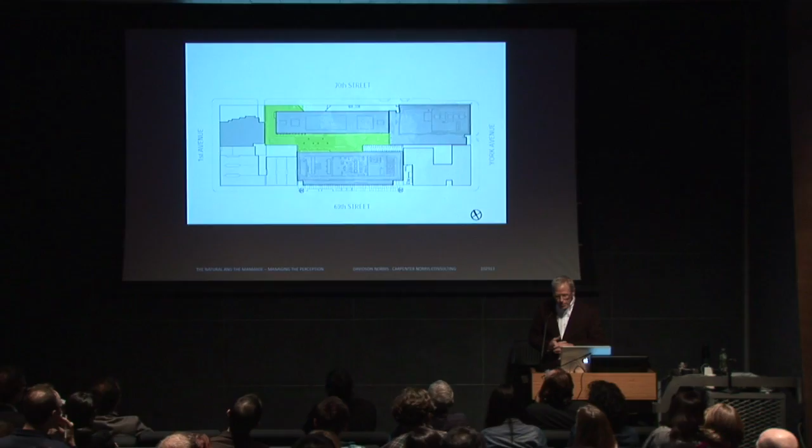You're looking at a courtyard on the Upper East Side. On the south side of the slide, a new building has been erected that is probably 300 feet tall. On the upper right, in the northeast corner, is an existing building, probably about 200 feet tall. To the north is a building that is probably 15 stories, or 175 feet tall. Smaller buildings to the west, particularly the southwest, and then to the southeast.

The result is that this space, given the fact that it previously had a much lower building to the south and therefore reasonably abundant light, now faces the quandary of having very little light whatsoever. So we were asked to take a look at what could be done in order to restore some of the daylight to the space.

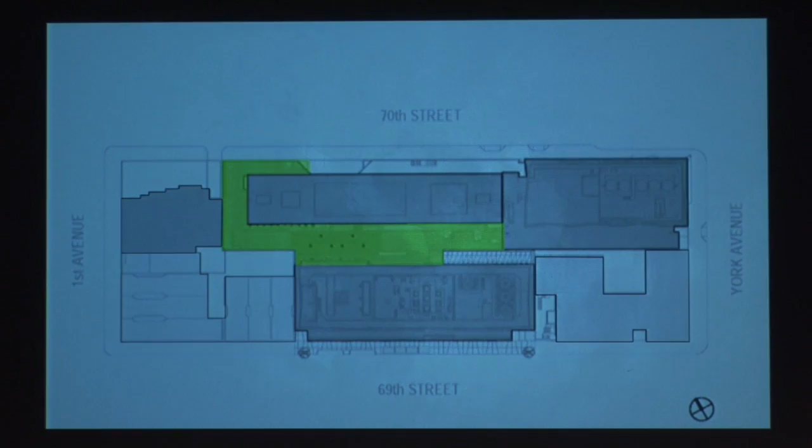These are the architect's renderings of the space on the upper left, and then a construction shot taken some months ago on the lower right. At the very least, the architects didn't kid themselves and provide a light image for the prospective courtyard with the sun blazing in and with lots of bright characteristics typically identified with daylight. I think his portrayal is actually reasonably accurate. But as you can see, it is a space that has very little or no direct sunshine.

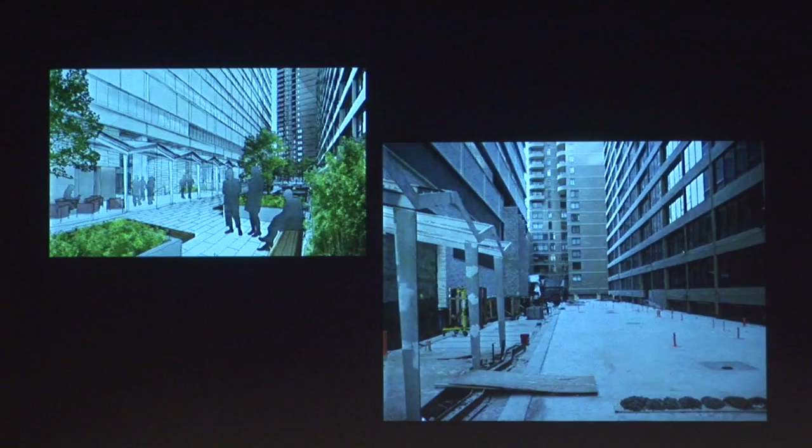Another perspective, this one looking towards the west, and you can see the presence of a raised platform in the mid-distance, which is one of the architectural focal points of the space.

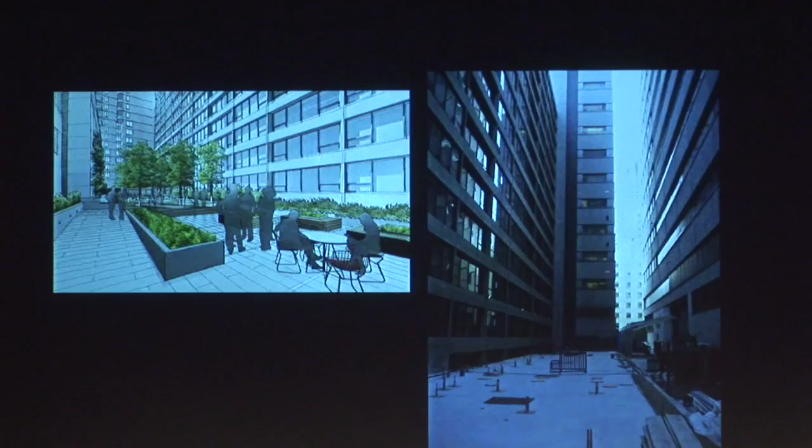This is a sun mass diagram taken from the center of the courtyard, and as I think it quite vividly proves, there's very little in the way of direct sunlight that ever strikes the center of this courtyard. You can see, however, that there are two windows.

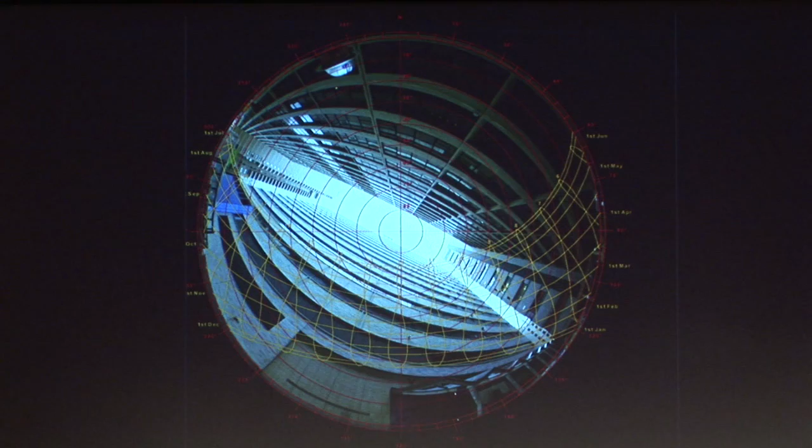If one starts to think of this as a space, there's a window off to the east, and a larger western window over here, and then there is a skylight overhead. So despite the fact that this space is very enclosed, there is the promise of some light resources that we can count on in order to modify the light regime in the courtyard itself.

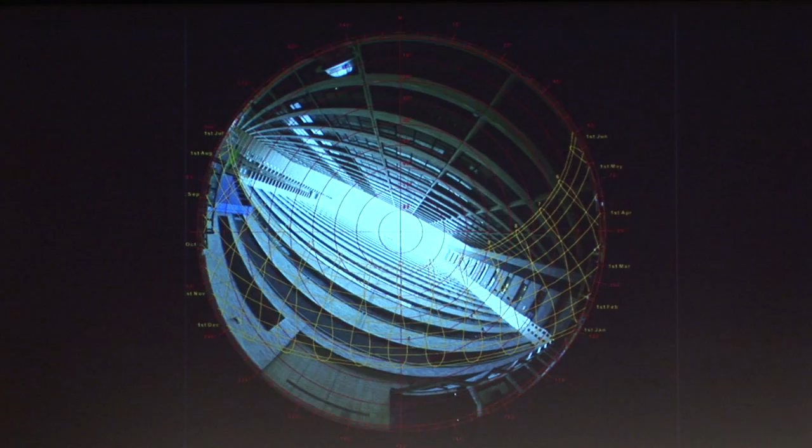Nonetheless, this gives you some sense of the quality and character of light within the courtyard. So what we were given was the daylighting fact.

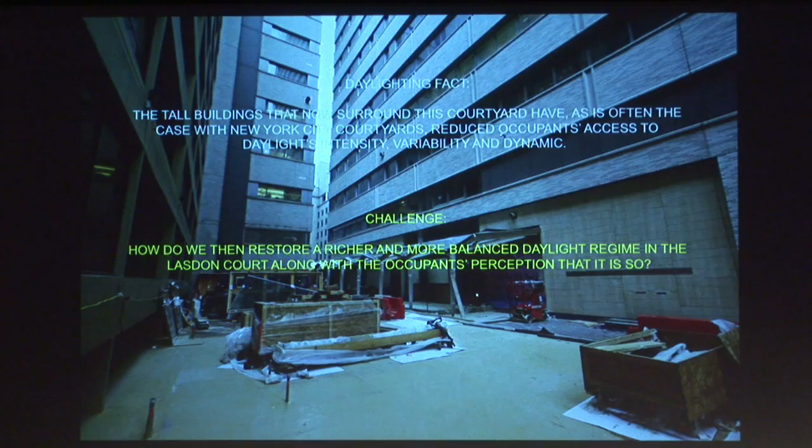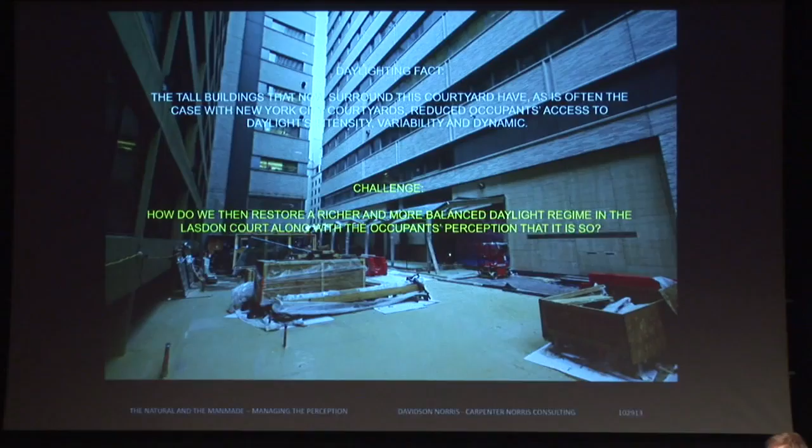Tall buildings that surround this courtyard have, as is often the case with New York City courtyards, reduced occupants' access to daylight intensity, variability, and dynamic. The challenge is, how do we then restore a richer and more balanced daylight regime in the Lasdon court, along with the occupants' perception that it is so?

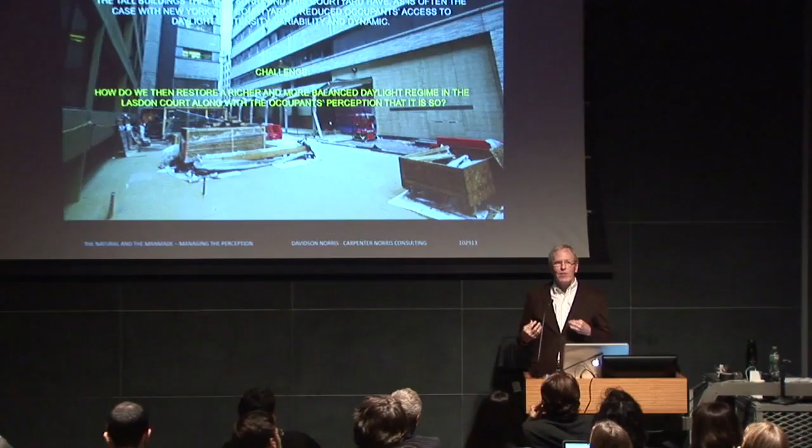This last one, perception that it is so, is critical. It's not a question of trying to bring back the light that used to be. It is a matter of how we can bring back the minimum necessary light to make people believe that there is not abundant, but maybe adequate daylight in the courtyard itself.

So we're trying to do this kind of minimalist restoration project of light in the courtyard. The first thing that the team did, and this was very much a collaborative enterprise between the architect, the landscape designer, and the lighting designer, was to come up with an appropriate solution.

I think we quickly settled on Paley Park as having the right kind of quality of space, quality of light that we were looking for. Also the fact that it provided a place for people to sit down and actually experience and hopefully enjoy the courtyard. It had abundant greenery, so there was a landscape feature to it. And then there was this water feature.

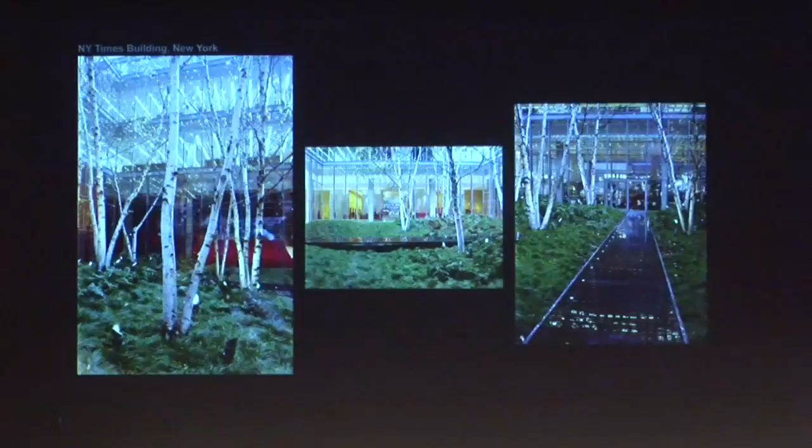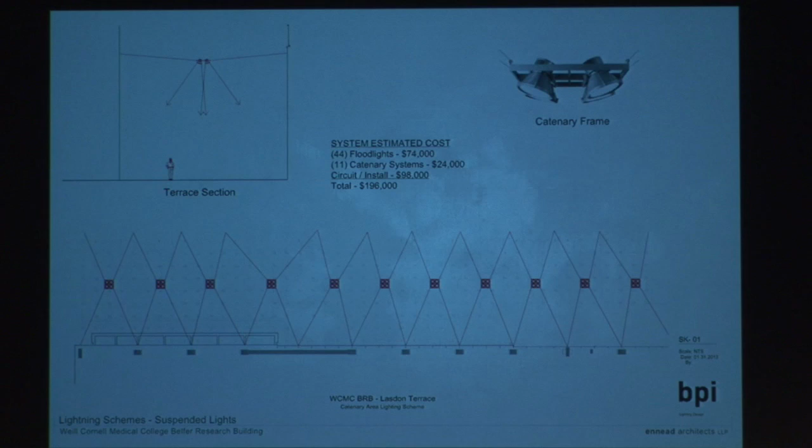The lighting designers proposed the option of actually illuminating and restoring much of the light using electric light resources. They were somewhat sheepish about proposing this because they realized that with this kind of proposal, they were never, ever going to be able to duplicate the intensity of sunlight, the color rendering of sunlight, never mind its dynamic. So this was proposed as, this is a really poor idea, but we're putting it on the table anyway.

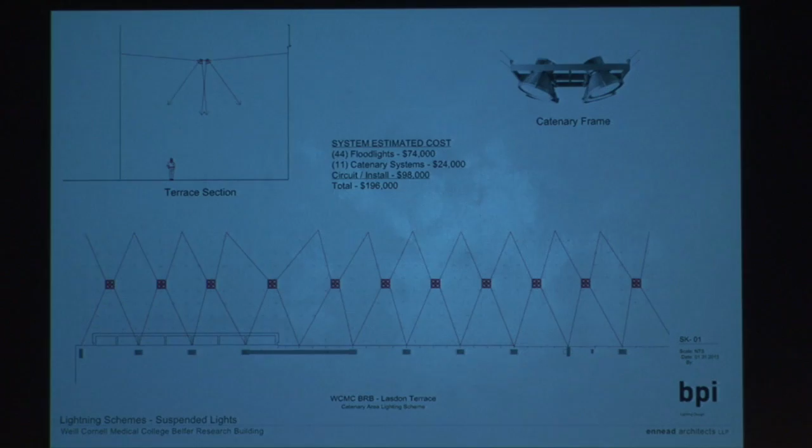The one issue here, however, common to all heliostats, is that for all the information and character and quality of natural light they reflect, they in fact subtract from our perception and experience of that sunlight a key feature, which is its dynamic. It is static sunlight. So we were somewhat compelled by the idea of using heliostats, but reserved about that light having to be carefully targeted, being pretty much static.

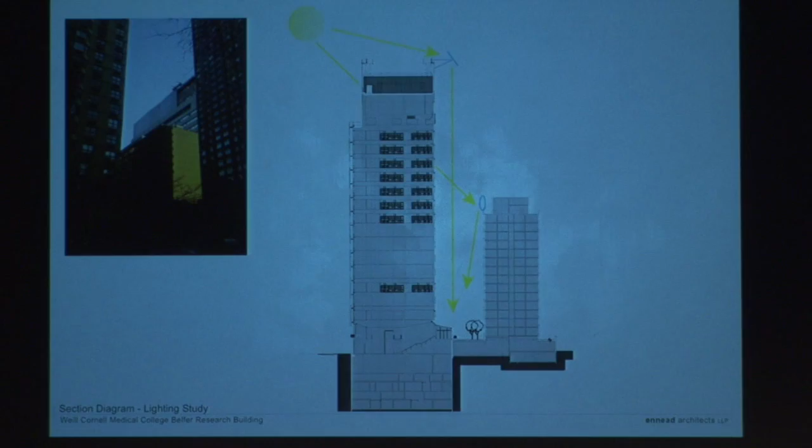In addition, these kinds of devices are fairly costly, and putting them on buildings where we could gather and redirect light involves some pretty serious structural gymnastics. Beyond which, the institution took the position that it really didn't want any additional maintenance headaches.

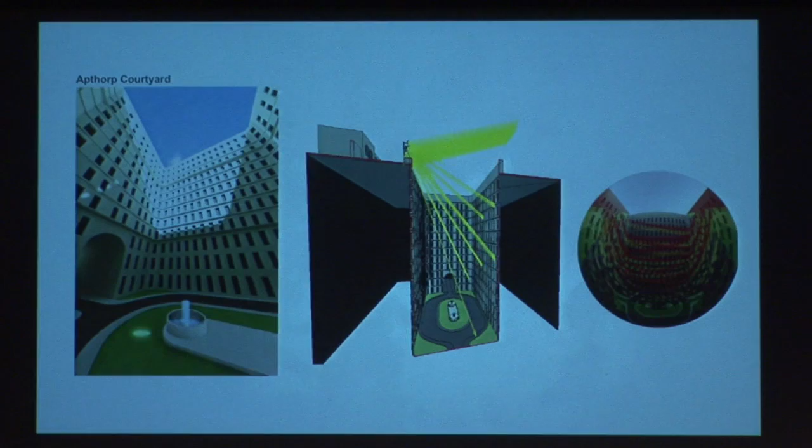So our focus turned to something that has been brewing in our office for some number of years. Given our experience with the heliostats, and for the reasons I just cited, we had started to consider moving away from sun-tracking mirrors to a matrix of mirrors, an array of mirrors that replicated much of what the heliostats did, but did it with fixed mirrors.

The heliostat changes its tilt and turn literally every 10 seconds in order to target the light. What if, over a given day, you had 20 mirrors that subdivided that period, and each one was fixed and provided light at a given time on a given day? So with enough fixed mirrors, you could actually replicate much of what you get with the heliostat, and in theory do it at lower cost.

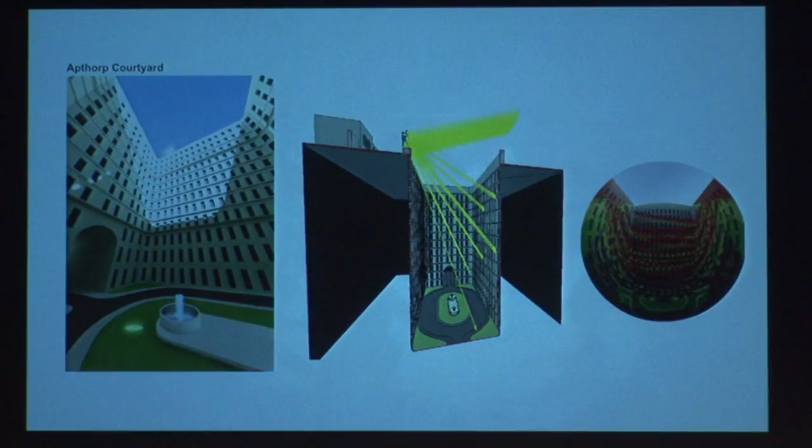So this was a thought experiment we did using the courtyard of the Apthorp on the Upper West Side. One of the complaints in the Apthorp is that for all the cost of the north-facing apartments that look out into the courtyard, they never get any sun. Real estate agents selling those apartments were very interested in possible ways of reconnecting them, and therefore their value, to increased sunlight.

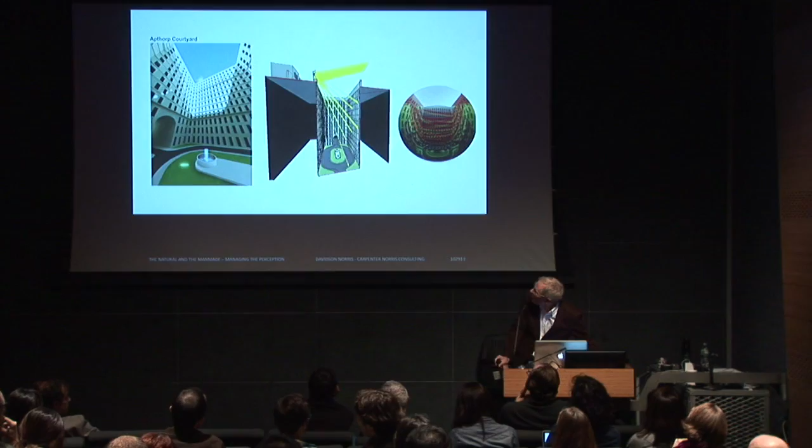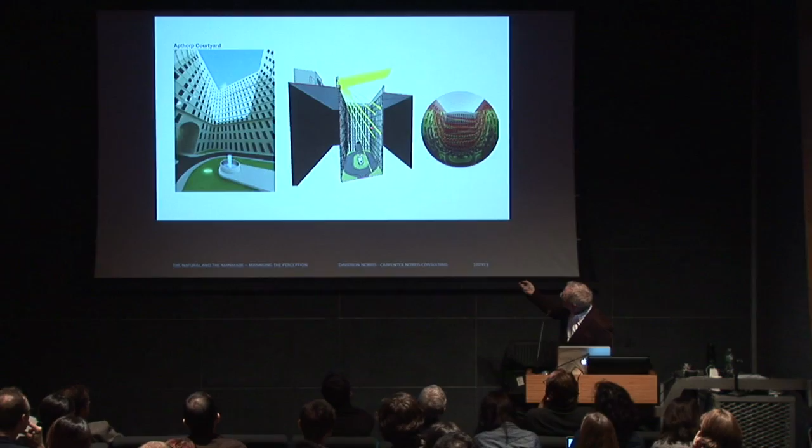So what we proposed was an array of only 9 mirrors up on the northwest cornice of the Apthorp, each one fixed, designed to project a series of beams starting at the courtyard level up to the top floor into the courtyard. A series of studies we did made this look very promising. Over the course of the day, this mirror would move across on a gentle arc and essentially illuminate, with reflected sunlight, all the apartments at this level.

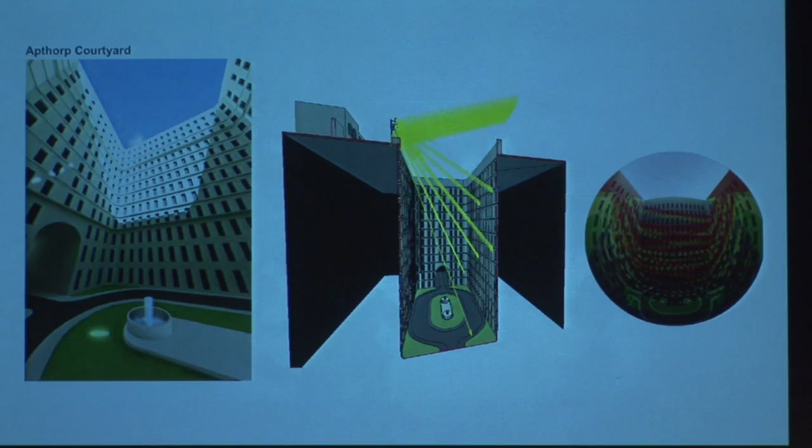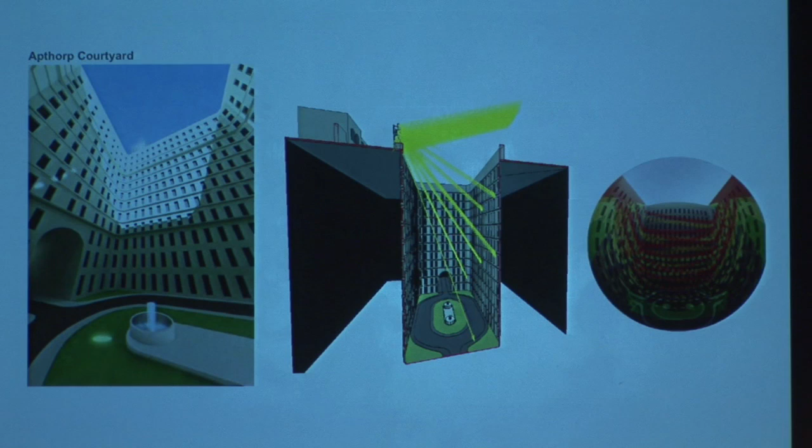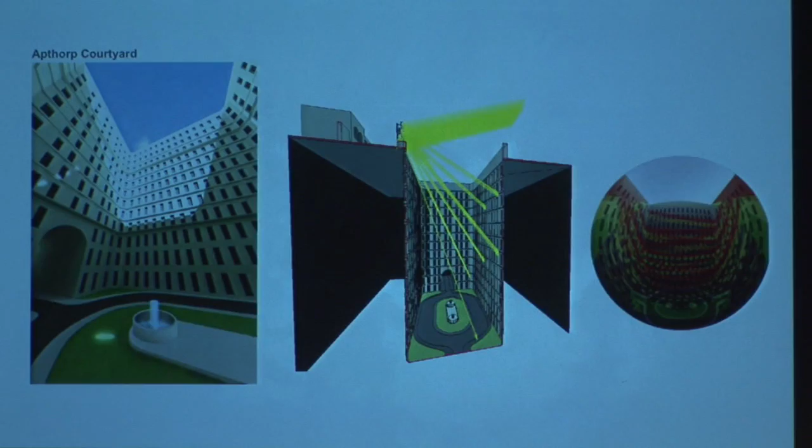This image on the right takes all the days from December 21st to March 21st and records all locations of the reflected sunlight. As you can see, the coverage is actually extremely good, all the way from down in the courtyard itself to nearly every apartment in the building. It was enough of an experiment to convince us this could actually work, and it became one of the options considered for our uptown courtyard.

Our confidence in this was amplified by a project recently completed in the new federal courthouse in Salt Lake City, Utah. We were given the charge of an art project—what to do with light in a very tall, thin atrium.

The first thing was to occupy the atrium with targets. In our parlance, these are targets—objects to which one directs light in order for that light to be redirected in such a way that you perceive it, enjoy it, take note of it, and it changes your perception of the space. They are extruded hexagonal, highly reflective aluminum prisms, and in fact take their inspiration from ice crystals that form frequently in the atmosphere surrounding Salt Lake City.

So if you have your ice crystals, the next question is how do you get the sunlight on them? You do that by a series of mirrors at the top of the skylight that reflect the light down, each tilted at a different angle. The result is that each one projects light directly down into the space so that it intersects with the intervening ice crystals in such a way that they interact regularly. Now, it takes the sun being on axis with the skylight.

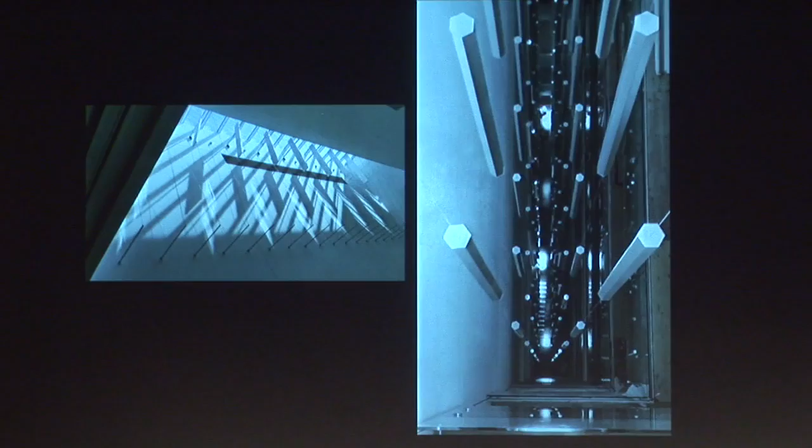So we got these images back and started to gain confidence in our idea that these fixed kinds of systems could not only deliver light in abundance, but they could do so as long as they hit the targets in a very perceptible way.

Over on the left, a slide showing what happens when the light is projected down and into the ice crystal field. The shadow right here is clearly one of the extruded hexagons that has intercepted the light, so that light is being bounced around within the space.

Over here is an image of the inspiration for this project, which is called a sun column or a sun mast, and it has to do with the formation of ice crystals in the sky, and then they orient themselves in such a way that a low-setting sun reflects off of them and guides the beam to your eye. And a bit of an aside here.

I think one of the frustrations that we feel as daylighting designers is that the resources we have to design daylight in a given place, in a given location, are only quantified. It's never qualified. And the difference is over here—this is a page from a wonderful, extraordinarily valuable document that we use regularly in our office, which is the NREL Climatological Catalog.

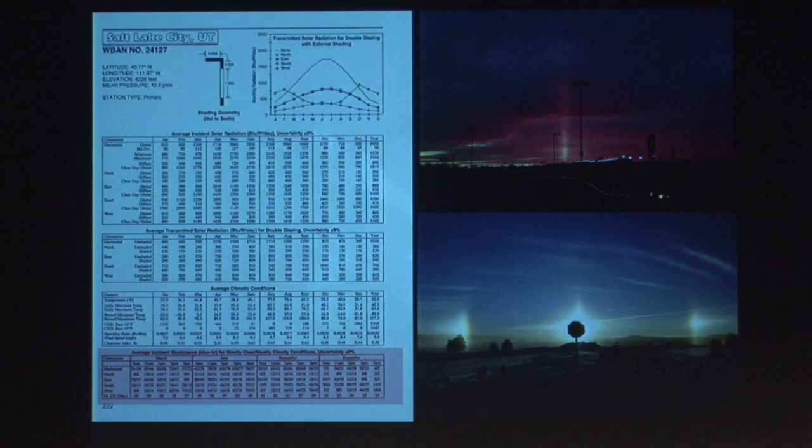What it doesn't qualify—so I call this the light of, or the daylight of photon replacement, right? What it doesn't qualify is this, and this stuff happens in Salt Lake City. And I think that there needs to be another page now in the NREL catalog.

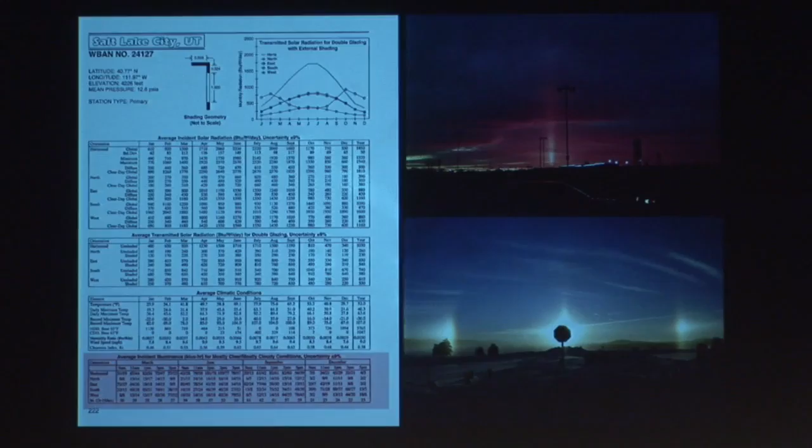It has to identify how often rainbows occur. It has to identify how often sundogs occur. It has to identify all of these different atmospheric light events that are not part of removing electric photons from an office space, but are rather engaged in your experience, your second or third perceptible experience of a given atmospheric environment that is absolutely essential to one's understanding of place.

All right, now back to our project. The first thing that we did was to identify two areas within the courtyard that we felt were appropriate primary targets. One was at the east end. There is a formal stair that connects to the street through here.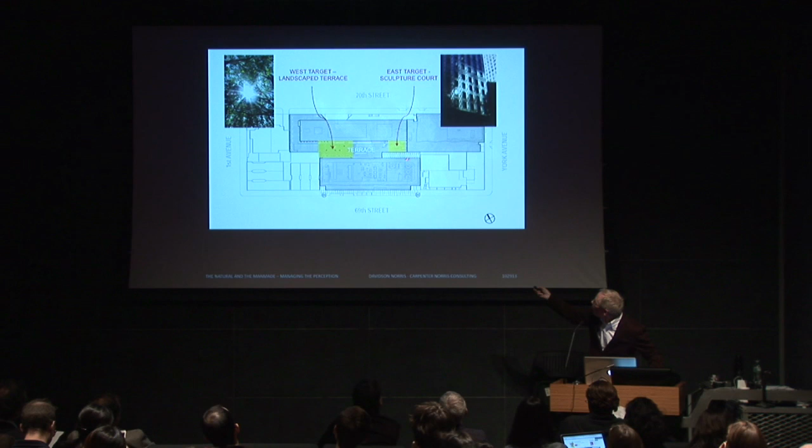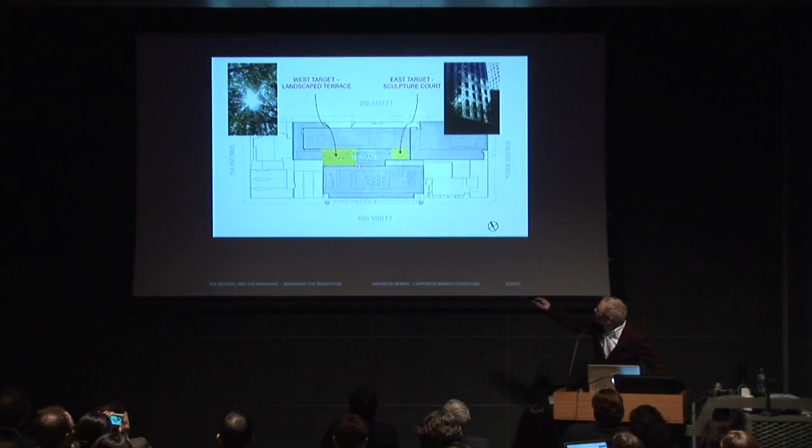And arriving at the top, we felt it would be important for one to perceive sprinklings of light within it. And then over here, this raised platform where most of the occupants, either the researchers here or the residents here, would congregate for lunch, would congregate with their families, and so on.

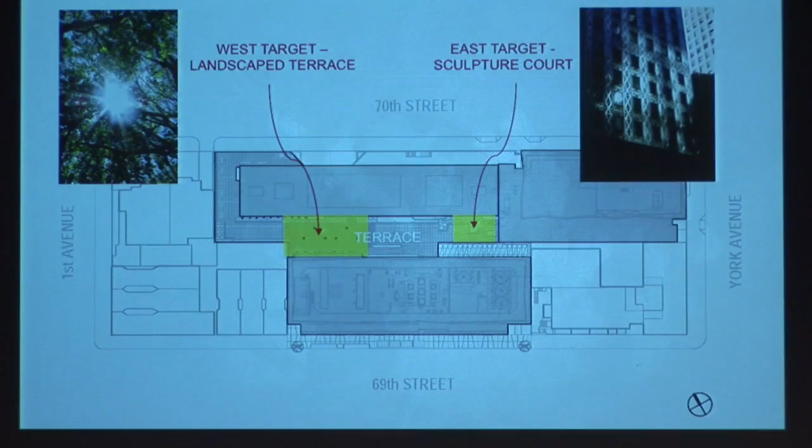Over here, essentially, we were talking about light being reflected off of a series of reflectors and directly into the space. Over here, because there were trees anticipated on top of the Ipe platform, we were anticipating this kind of much more filtered light.

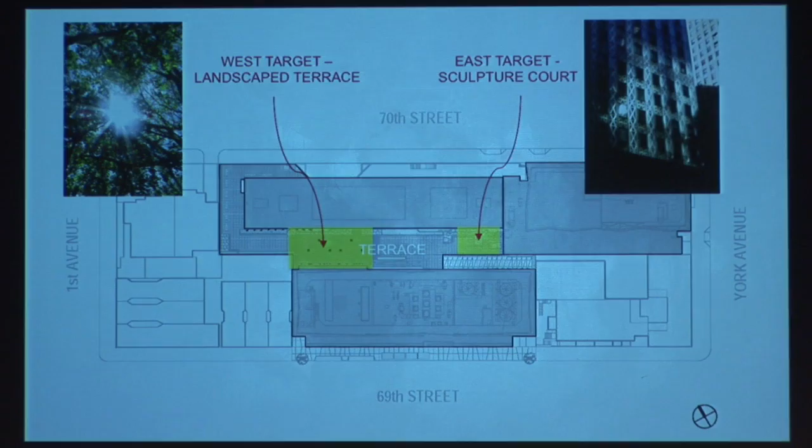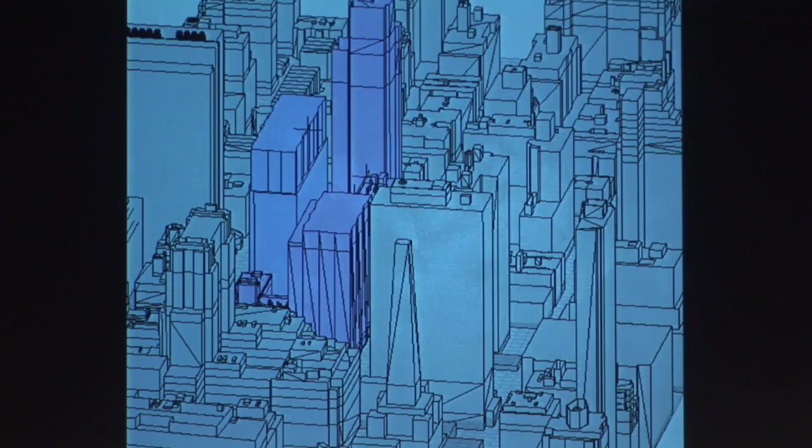Next, we had to verify that the solar access was adequate, and also used it to determine fixed reflector field locations. So what we did was, probably fairly common to you guys, a series of sunshot studies that indicated, one, that eastern window was actually going to be very important to us early in the morning. As the sun came around, you can see that by about 10 o'clock, it is completely occluded from the interior space.

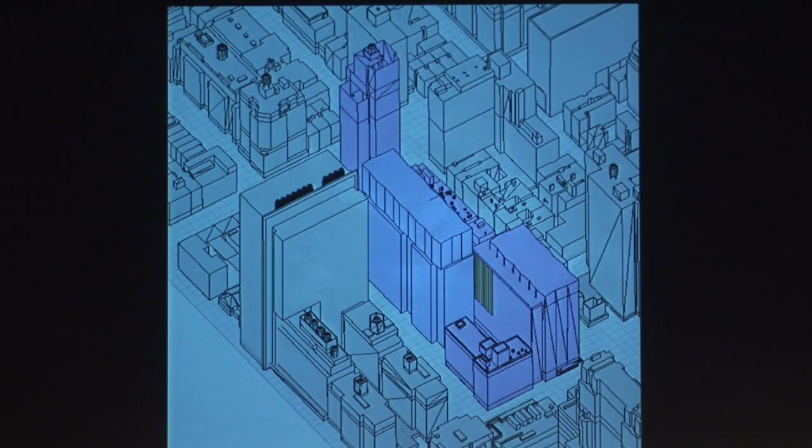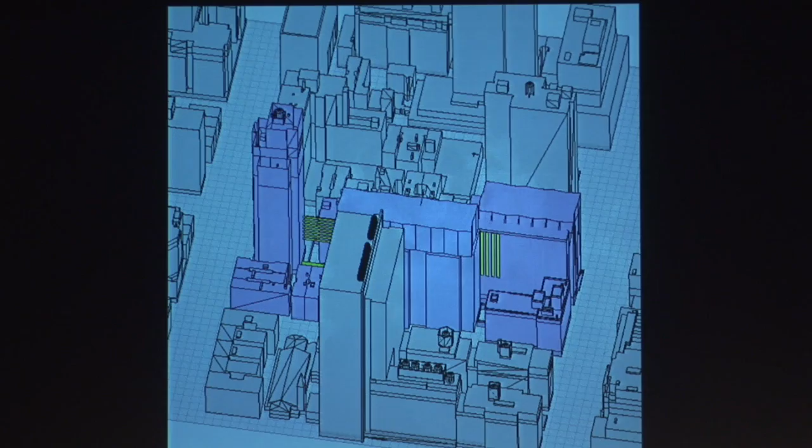If you look at that yellow patch there, there was plentiful access if we located a fixed reflector field there. And then as the sun continued on its journey around, this was a very interesting feature to us—it showed that the reflections from an eastern field on the right and a western field on the left would both be synchronous at certain times of the day. So there would be no drop-off, no gaps in the sunlight as it moved across the sky over the course of the day.

And then off into the sunset.

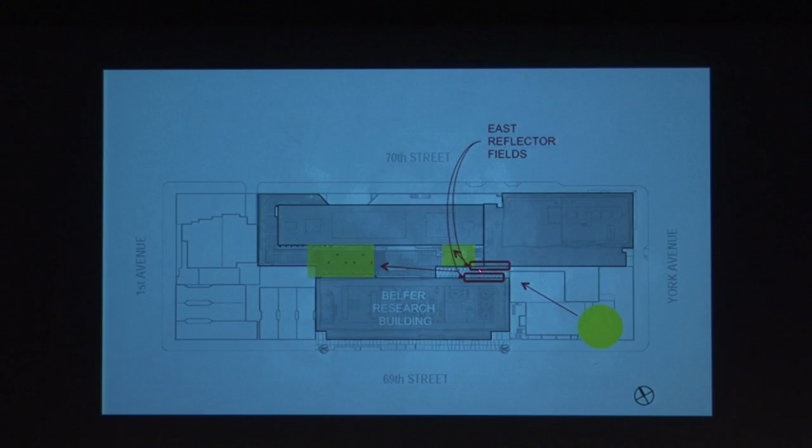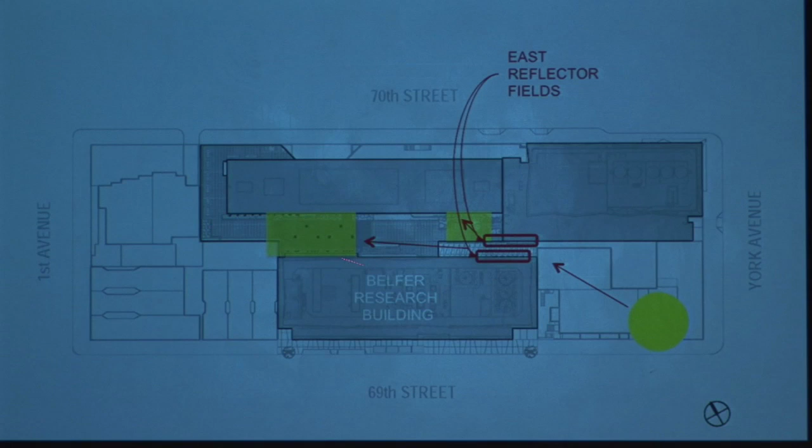The first set of reflectors we looked at was in the eastern quarter, shown here. We realized that we wanted one set of reflectors mounted on the south face of this building that bounced light across to another set of reflectors on the north face, eventually putting it into the courtyard, where a secondary focus in the morning would be the Ipe platform, the landscape platform, and the primary focus would be the courtyard at the top of the stairs.

So what we came up with was a pattern of 5 foot by 5 foot, highly reflective, specular stainless steel panels affixed to the spandrel on the new building to the south, directly facing across this modest gap. Another similar field of reflectors is mounted on these spandrels, so the light hits these and bounces into the courtyard.

We then took a look at the western side, and here you can see the reflectors mounted near the cornice of the southwest corner of this residential tower. These were primarily directed at providing light to the landscape platform. This red dot is important because that was the target for the reflectors in this field.

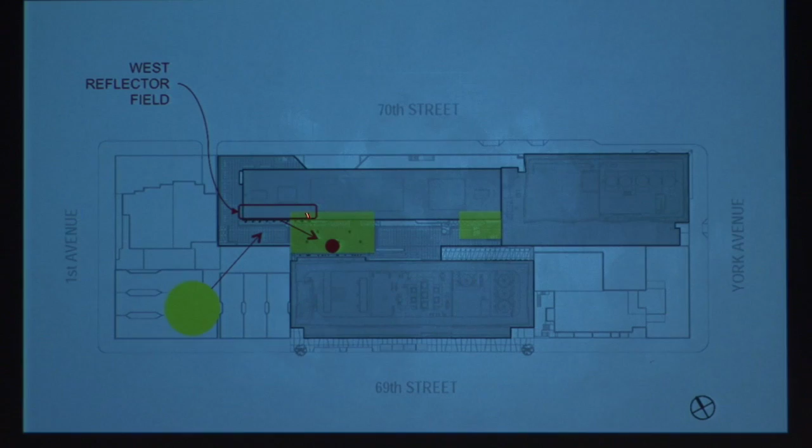Here's a slide of the proposed reflectors, and unlike the ones on the eastern side, these are tilted and turned. Each one is designed for a specific time—starting in December, running down through June, from about 1:00 to about 4:00. Each of these, on about a 20-minute cycle, is designed to put light at that target point during that time of the month.

This is the matrix where we had columns A through J and rows from 12 through 6, going from December to June and back up again. Each one at a given time—say 2:40 p.m. on June 21st—this reflector right here is targeted to provide light at that target point.

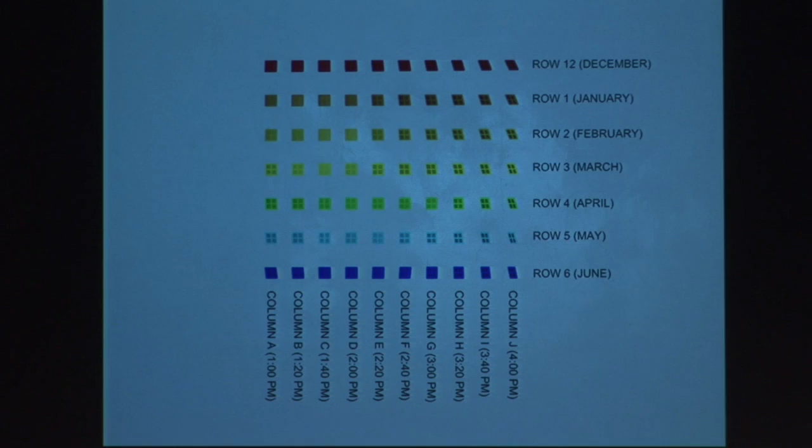Then we evaluated the added reflective light with respect to its occupant perception, location, timing, and distribution.

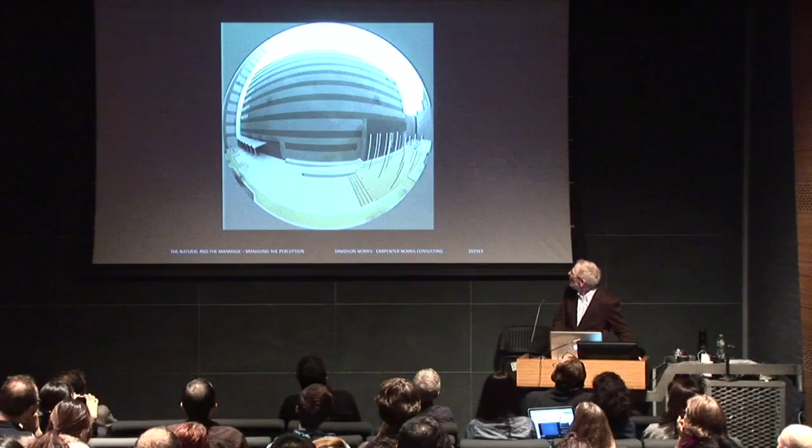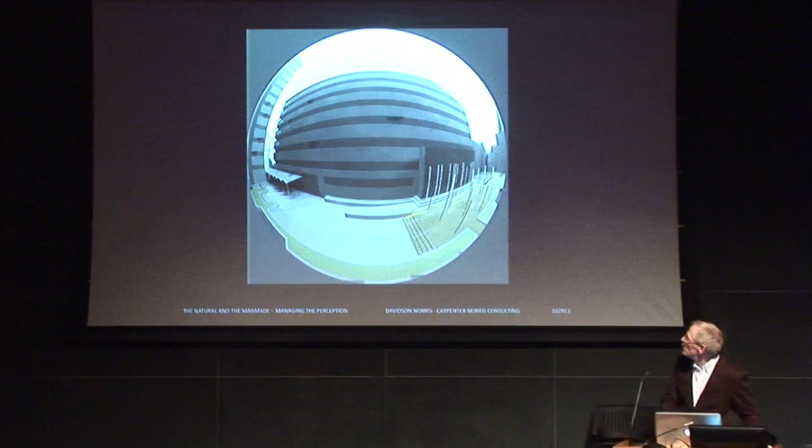This is a series of Radiance images that we produced. Over here you can see the landscaped platform, and over here the top of the stairs with the secondary target at the eastern end of the courtyard. This shows the light projected into the courtyard by the eastern reflectors during the morning and the western reflectors during the afternoon. It starts at about 8 o'clock and runs through about 6 o'clock. I'll run through them one at a time.

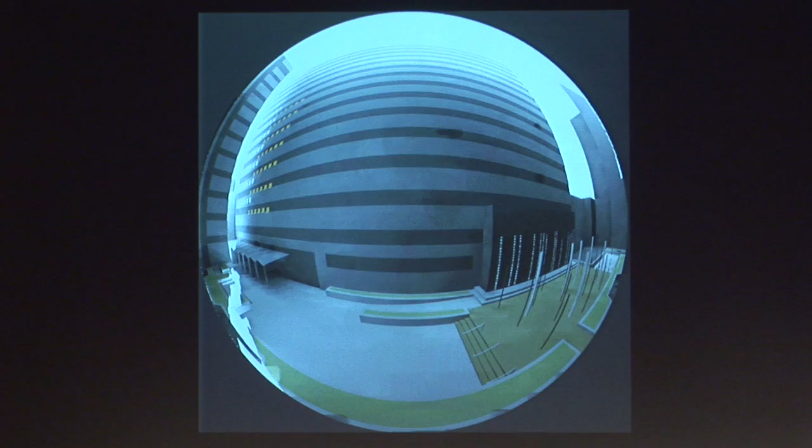Bright light coming in through that window, even brighter. You can also see additional light being reflected from reflectors on this face of the south-facing tower—these are the remnants of that reflected light. These are being directly reflected onto this hops wall, a landscaped wall. Now you can see the full deployment from the south-facing reflector field moving across, about to intersect with the north-facing field. These patterns here are all double reflections—hits here, bounces into the courtyard.

Whoops, I'm going the wrong way. Sorry.

Now it swings around to the west reflector field, and remember, the west reflector field is much more targeted. Observe down here, that's the target point, and what you'll see is a series of these moving through the target point.

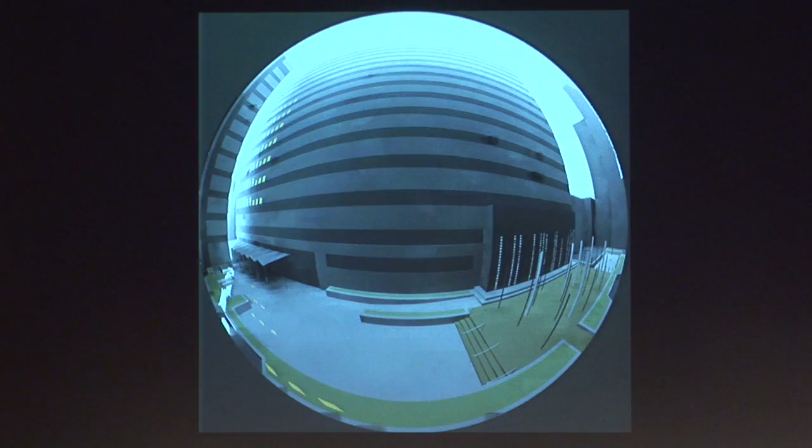Now you can see over here, remember this is landscape. There are trees in there. And so those patches of sunlight, as they stream down and hit those trees, will cast shadows, penetrating through the canopy, creating light-space incidences that are common to us all and perceptible to us all. That will hopefully be part of that shift in perception.

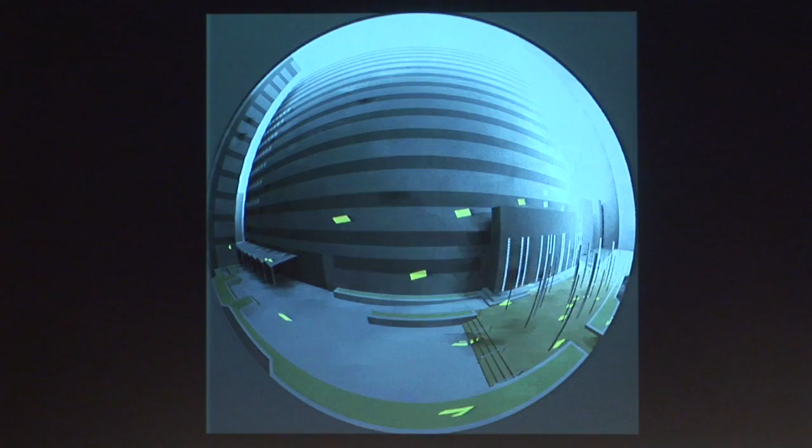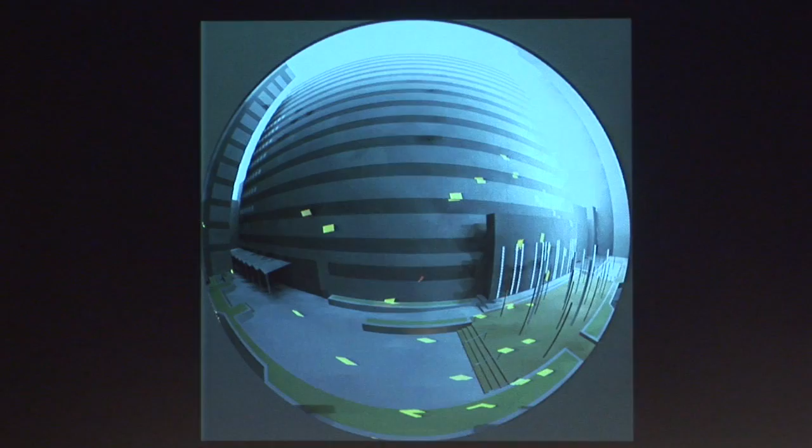Then as it moves on through the afternoon, you can see this migration of this school of light patches towards the east, and it moves up and onto the north face of the building, keeps moving, and disappears. I think this gave us a good deal of confidence that we could deliver the light, and make it comparatively very animated, targeting these two basic zones we had designated.

The next thing was, if that's what we had to do in order to harvest the light and redirect it to these places, then we felt we had to provide secondary targets that allowed you to perceive it much more readily.

We had just completed some work with Michael Van Valkenburgh's office on a park down at 26 Federal Plaza, where they had these security camera poles. You can see the security camera here. We said, okay, if those only have to come up to 12 feet, why don't we make them 25 feet high, and install some highly reflective ribbons so they reflect more light and sparkle down into the park.

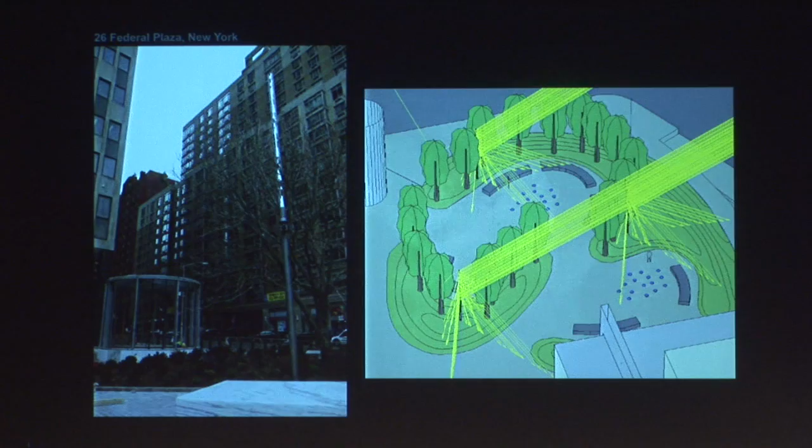It had some of the same problems, though not as exacerbated as the park uptown. So what we came up with is essentially the same idea of the ribbon, but now instead of 3 ribbons facing south, there are 12 ribbons that fully encircle these columns, embedded in the landscape on the landscaped platform.

This gives you some sense of what happens now. These aren't just trees, but these thicker ones are these light masts, sky masts we call them, and they too will receive the light, and given that they're highly reflective, they will suddenly bring brilliance directly to your eye, which will capture your attention.

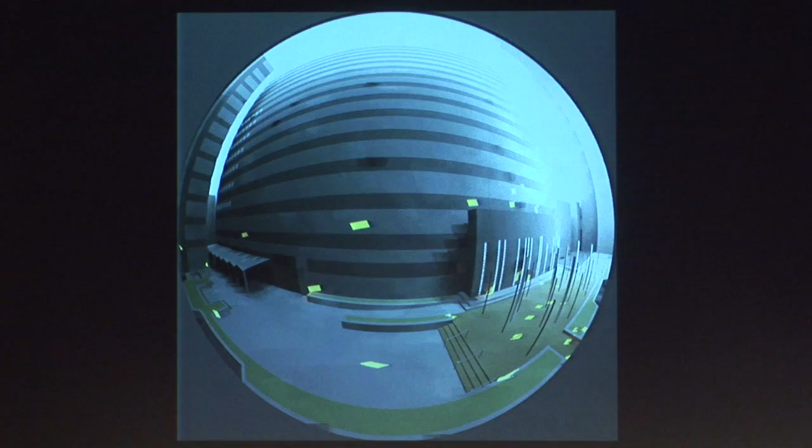The other part that was critical is that we're not just talking about redirected sunlight, but skylight as well. In all of our projects, it's not just about getting the light in, as an equal priority, it's about getting the eye out.

These reflector masts are designed so that if the reflected light from the fields hits a part of the ribbon, it will reflect it down. But if you're standing 40 feet away and look at the mast, there's a part of the ribbon tilted so it shoots your eye directly up. So what you're looking at is the sky. All of a sudden that sky that seems so distant, and you're at the bottom of this well, is now brought into your perception.

Sometimes all you see is the sky. At other times you'll see it along with the reflected beam of sunlight from the reflector fields.

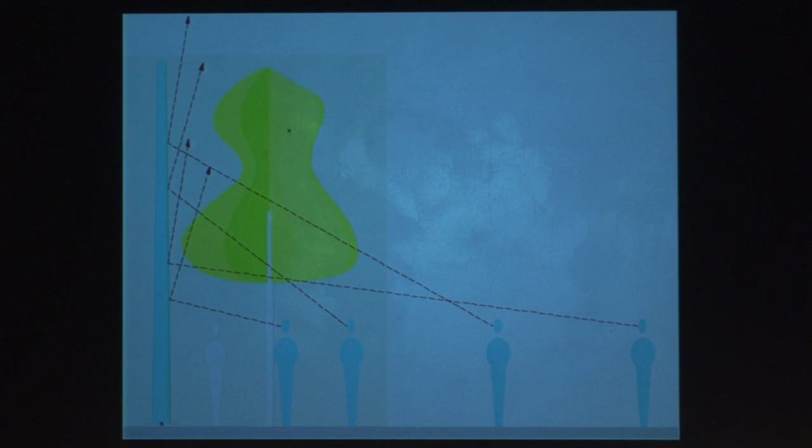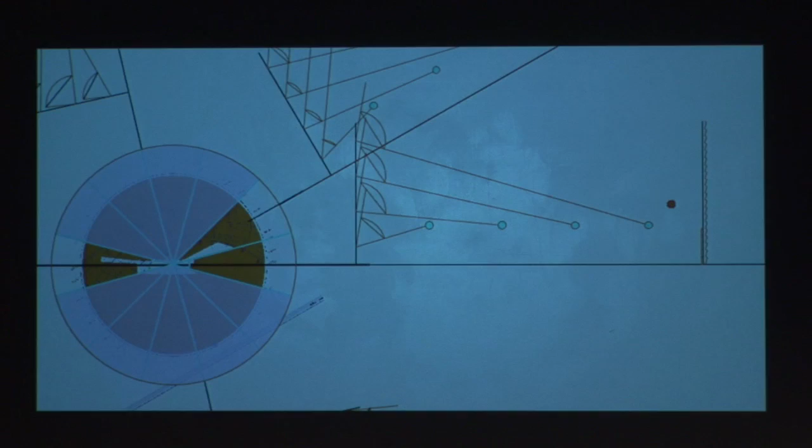This shows a quick slide of how we determine what those angles are. They differ depending on how that particular ribbon is oriented in the space. Here gives you a sense of the primary reflector for the sky—these are primary reflectors, coming down and out. This is coming from a lower angle. These reflectors take the intersecting light from the reflector fields and bring it to your eye.

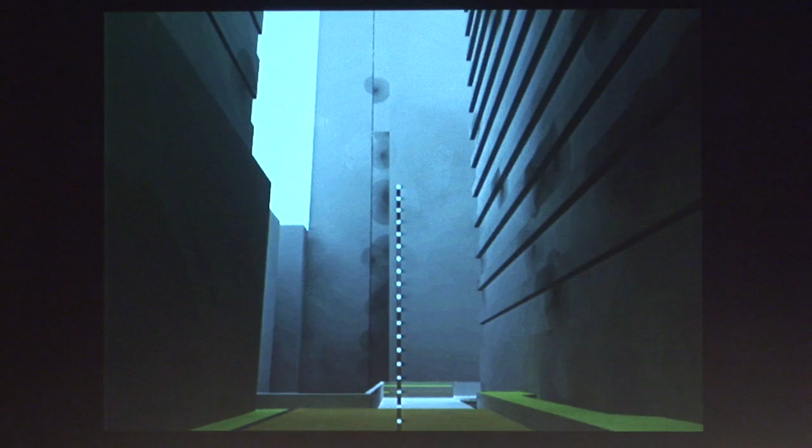Some tests looking at how it looked from 40 feet away—pretty good. We were getting good sky exposure at 30, 20, and finally at 10 feet away. This too showed, I think, that we're reasonably secure in this kind of system.

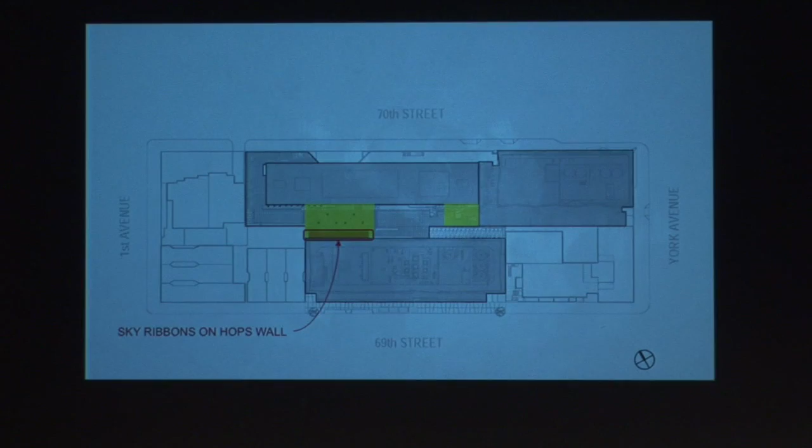The next target we looked at used the same technology, the ribbons, but now focused the ribbons instead of out in the open, integrated in amongst the trees, such as with the sky masts.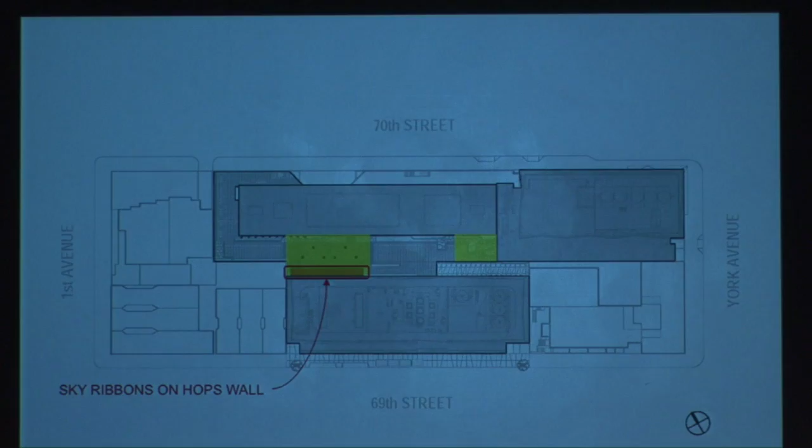The sky ribbons were integrated into a hops wall against the south side of the raised platform. Hops grows very fast and is very dense. The idea was to insert the ribbons in exactly the same plane as the growth of vegetation, so during winter when the hops dies, it would simply be this orderly succession of sky ribbons. During summer, when the hops grows, the conviction is that the leaves will actually integrate with the sky ribbons as well.

The result, we hope, is that it will be like looking into this forest that is kind of collapsed. Out on the platform, we have these sky masts amongst the trees, and sometimes you see them singly and alone, other times through the trees. This takes that imagery and collapses it into a single plane.

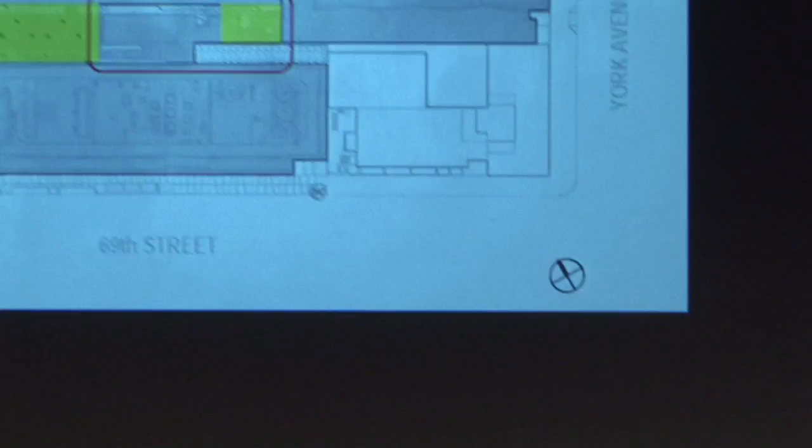I think the one I'm most curious about is what happens when the hops grows out and into the reflector system. At that point, I think people will look at it and say, where is that light coming from? Am I seeing all the way through the building? And it's those times I think we'll be able to capture not only their eye, but their imagination.

And then finally, we looked at another surface that was critical, which is the ground plane. So much activity takes place on the ground plane that we felt there needed to be some recognition of the sky there as well.

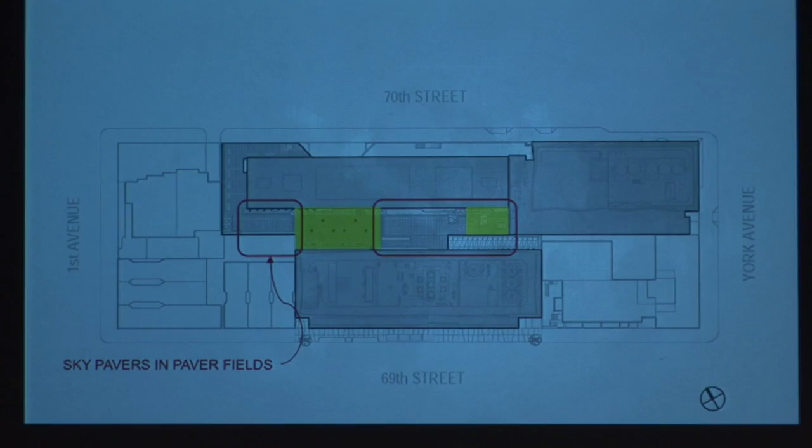So what we developed was a new concrete paver, basically a good solid gray. We came up with a much brighter granite paver, and embedded in it are highly reflective stainless steel buttons, so that as you walk over them and look down to make your way across the space, you will see a reflection of the sky—an opportunity to take the eye out as well as for light to reflect off of it.

I think this was very heartening. Our sense is that even under an overcast sky, we're going to continue to get a very perceptible, heightened appreciation of this minimal light available.

And then at night, the anticipation now is to include LEDs in the masts. I'm contrary—I don't like that idea, because I think there's already far too much light in too many places and spaces in New York, and a little bit of darkness wouldn't hurt anybody here. Never mind the fact that these are designed to reflect light from the exterior, and there's going to be a lot of light emanating from both sides.